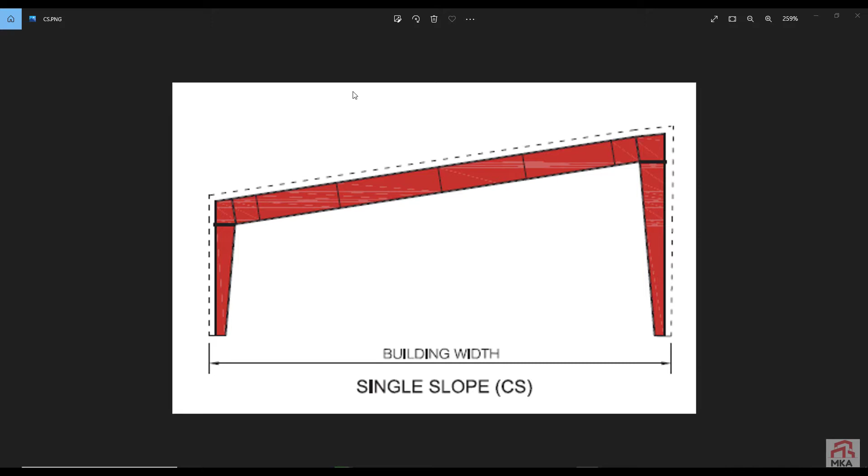In this video, we'll solve the single slope PEB structure project. Firstly, let's open our MkaPEB software. If the software interface is in Turkish, you can select the language from the language setting option.

Let's start by creating a new project and open the new project. Let our truss length be 20 meters, column height is 8 meters and axis spacing is 6 meters.

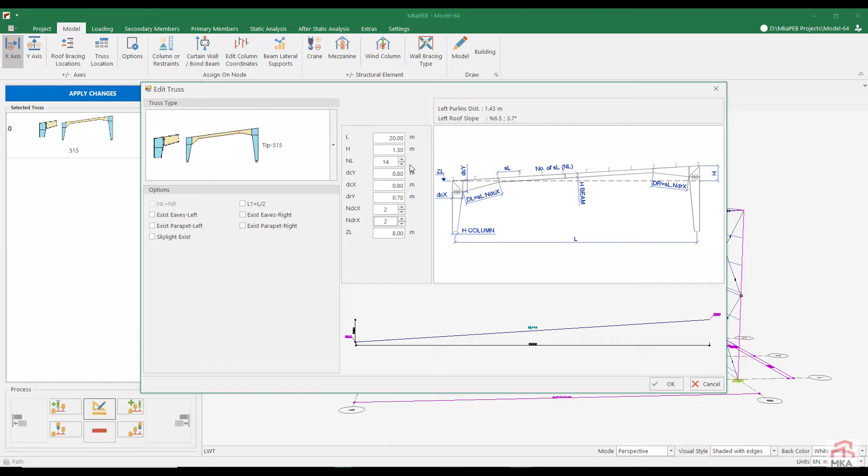Firstly, let's fix our truss attributes from the Edit Truss window. The tapered region will continue along the two purlins at the corners. The column edge height at the corner is 0.80 meters, or 1 meter if possible. It is a roof that doesn't have much slope, it has a slope of 6 to 7%. Let's update our structural model by pressing Apply Changes.

There are many loading codes in MkaPEB. I assume this project will be done in India, therefore I choose IS 875 as the loading code. There are sandwich panels as cladding on the roof. It is possible to define from this section whether there is a solar panel on our roof or not. But we will not use solar panels in this project.

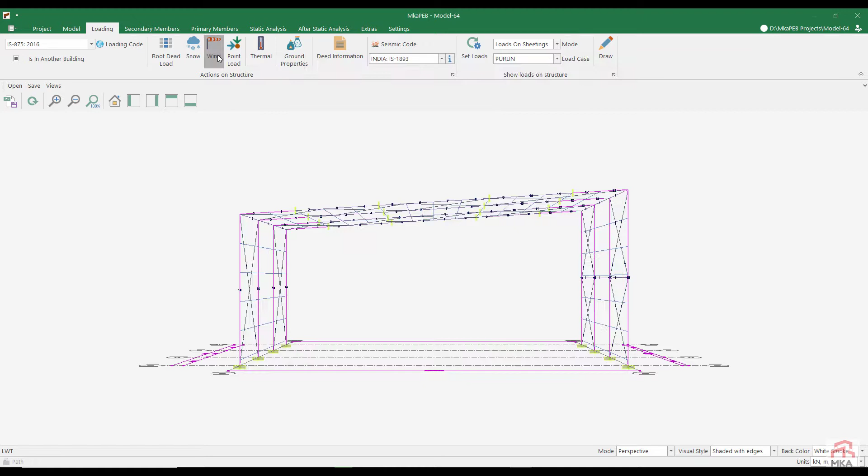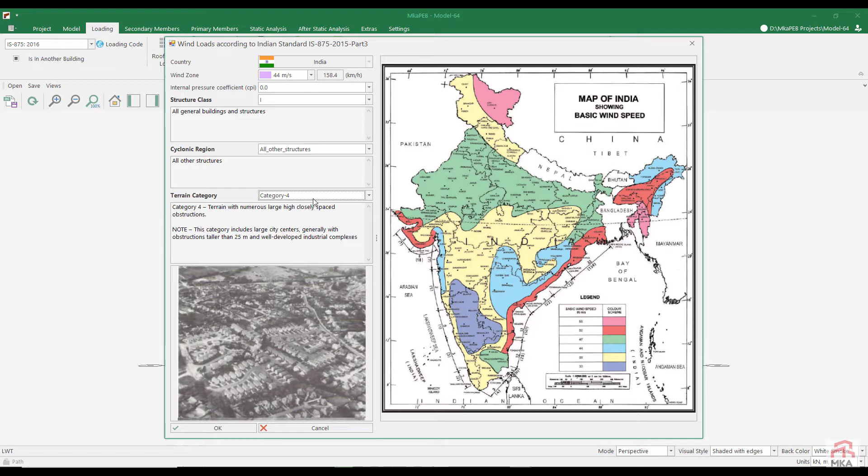Let's define a snow load of around 10 to 15 kilograms per square meter, considering the rain load. Let's select wind speed as 44 meters per second, and not consider internal pressure coefficients. Our building is inside the city, so choose terrain category 4. I close it by pressing the OK button.

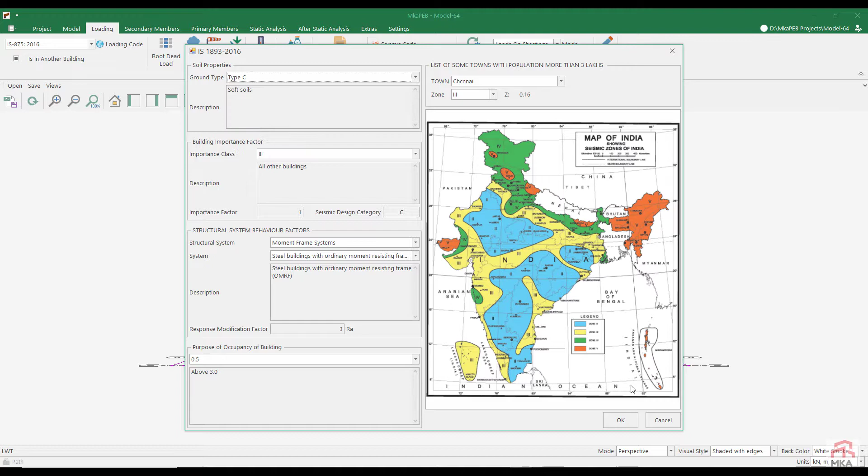Let's move on to the secondary elements. The program includes many structural steel design codes: Turkish, American, Indian, Saudi Arabian, Eurocode 3. I assume our building is in India, so we have to use IS 800.

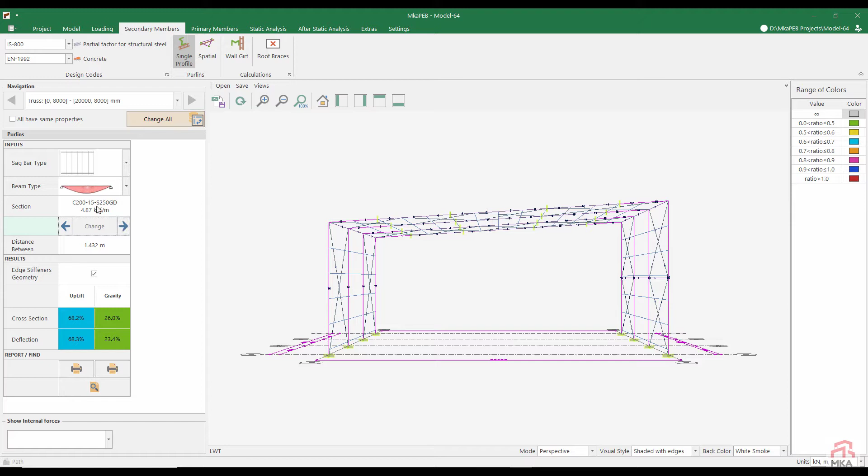I try to choose the roof purlins as light as possible. The loads acting on the roof are so small. I can define the C200-15 profile as the purlin section, 4.87 kilograms per meter. We can use sag rods, there is no change due to the low roof slope.

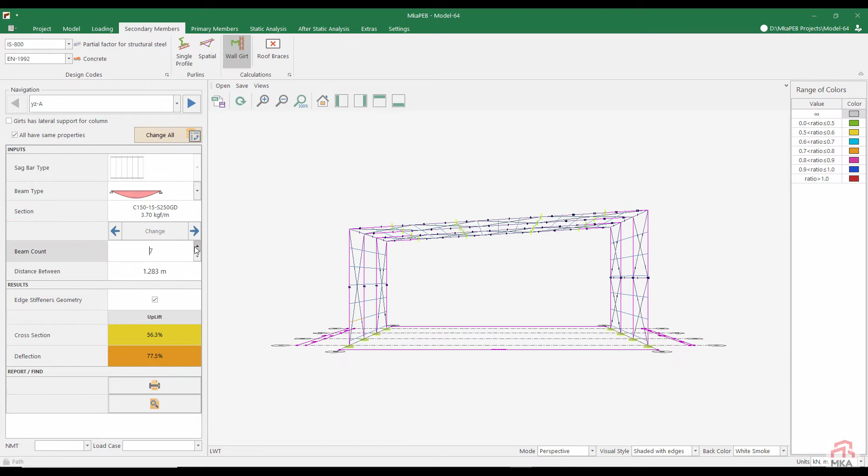Let's move on to wall girts. I want to use the same wall girts on the right and left of the building. So I marked all to have the same properties. The C200-15 section seems to be sufficient here too. Let's see if there is a smaller section. If I increase the girt count to 7, it will be the C150-15 profile, 3.70 kilograms. On the other axis of the building, there is no problem either, it works at 90% of capacity.

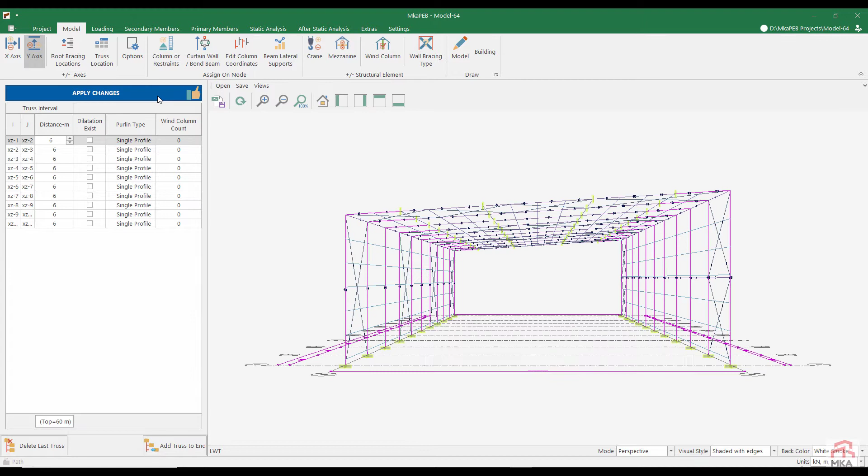Let's make our building a little bigger then. Our building width is 60 meters. Main columns, right and left columns. 140 by 10 over there. These profiles are not currently in the database, so I'm adding them myself. 400 by 8. We have chosen the starting section of this column here. The higher cross-section at the upper end of the column will come from the truss properties.

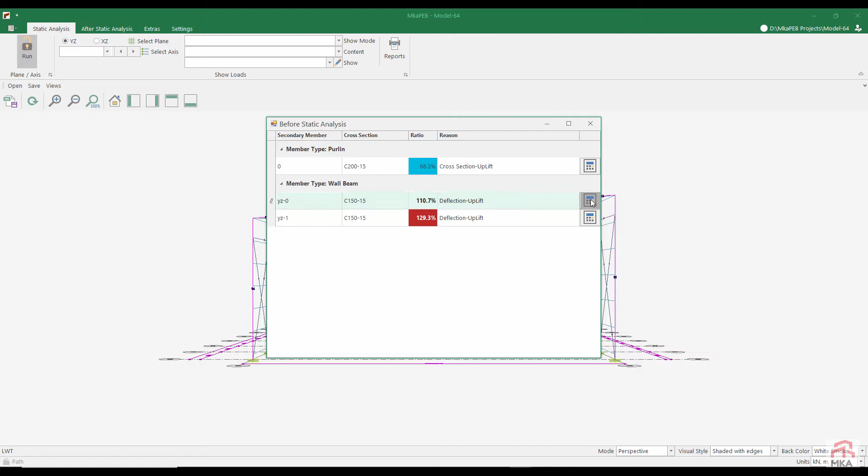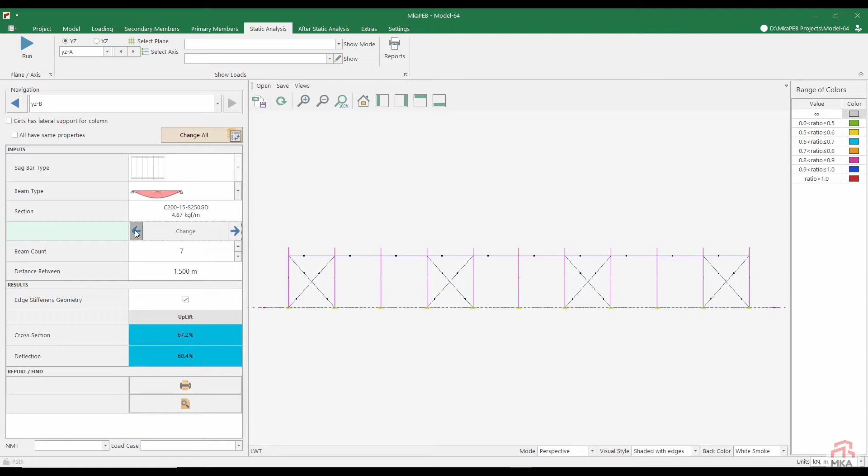Now we come to the beam section. I will use the same profile in the beam section. There is a problem at the girts. The program says that the width of the building has increased and the wind loads on the girts have changed. 150 to 20 or 200 to 15, which is better? This one looks lighter. I looked at the other side. I've replaced it with the same cross section, 200 to 15.

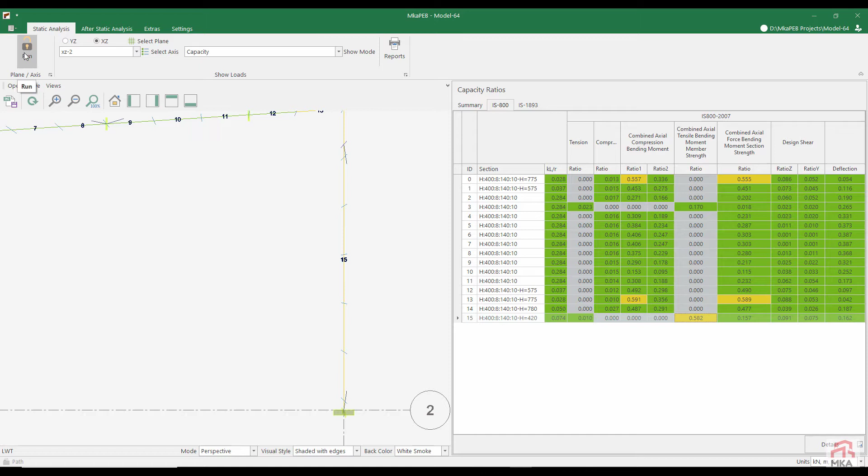We have a capacity of 58% in the columns we have chosen. I think these are the column sections 14 and 15. In the beams, I have chosen a little too large sections. We can shrink them a little. Maybe 300 versions, not 400. Main columns, I'd use not 400 to 10, but 300 this time. Even thinner. In S235 steel quality.

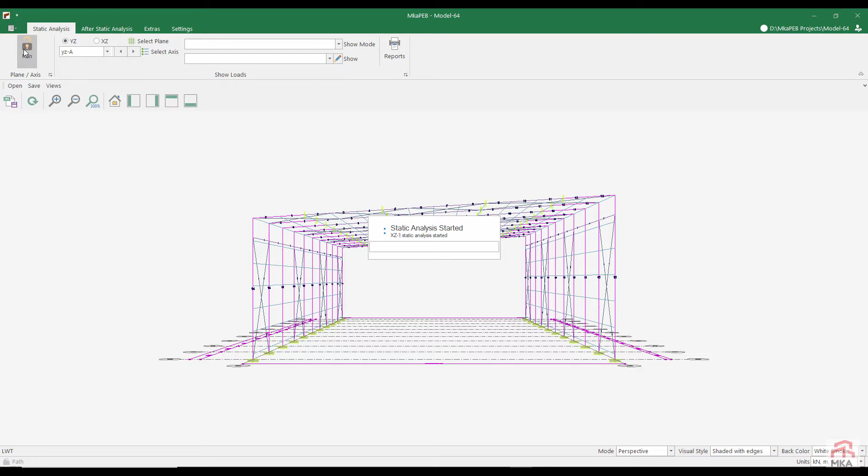Beams can also be chosen differently, but I'm thinking of starting with the same material and finishing with the same material right now. While our brace rods on the side are at 70% capacity in this state, our columns are at 83% capacity. Let's take a look at the cost. I wonder if we chose something expensive. The section we will use in a 20-meter span is 26 kilos per square meter.

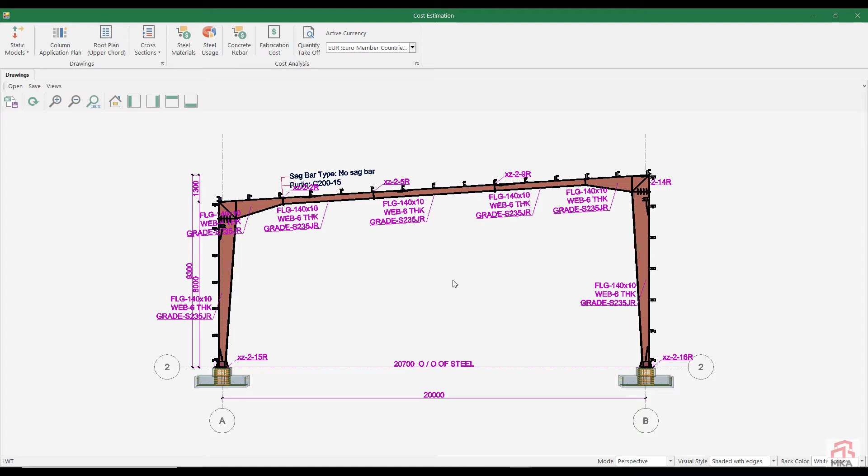Let's look at the shape of the building. Is there any place that bothers the eye? It would have been better if one or two more purlins continued here. Maybe we could make it a little lighter then. 26 kilograms is pretty good for this type of structure, but let's try to get even lower, shall we? For this, I first increase the following from the model section.

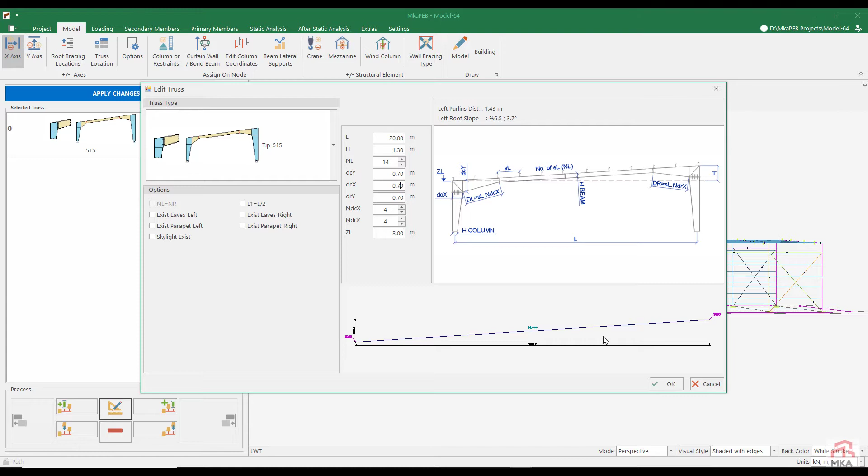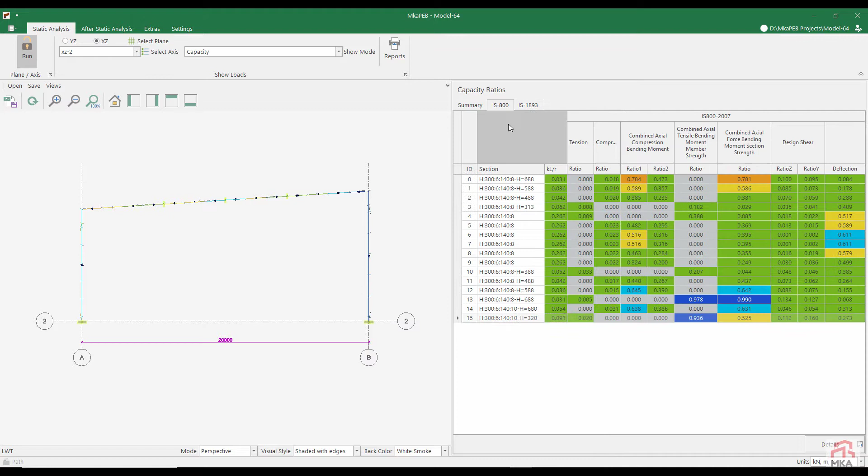Columns and beams. Let's see from here. There is no problem in earthquake regulations. When we look at it, all frame elements' cross sections are enough. Now the approximate cost analysis: 24 kilograms, by simply changing the sections.

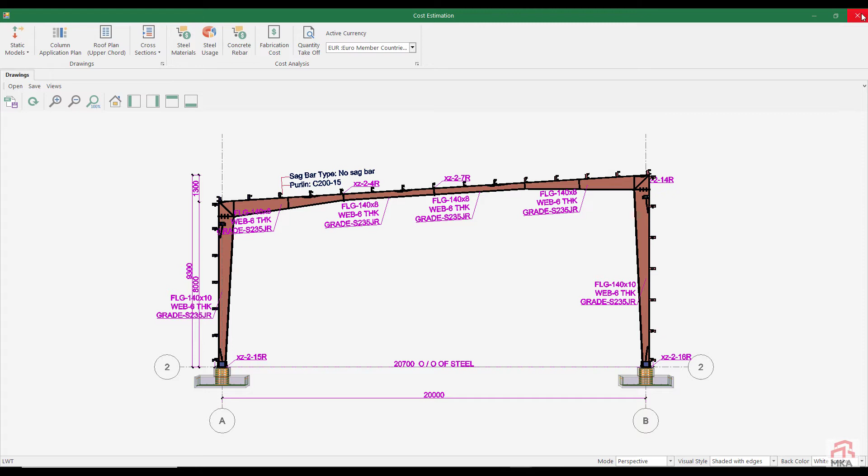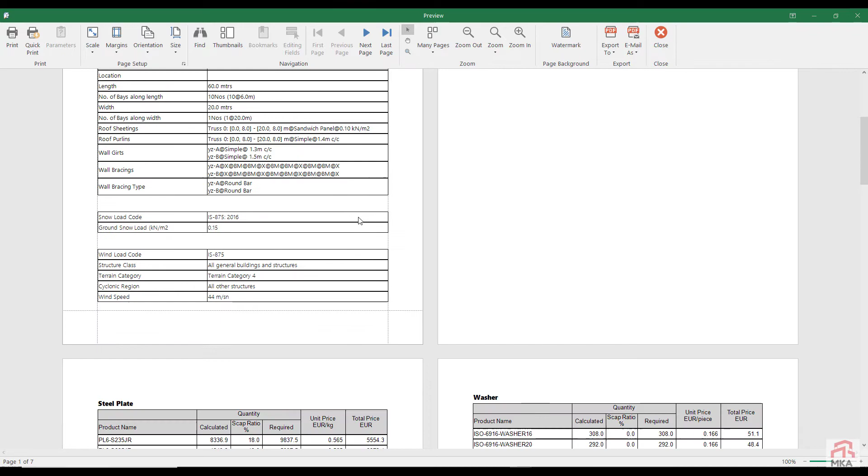Let's look at the cross section of the structure again. It turned into something like this. Now from here, we can actually access the diagrams of its frame elements. The schematic representation of the roof plan. The information of the columns and braces used. You can access the list of materials here. These are the things that show how much they've been used. There are nuts, bolts, anchors and stuff here.

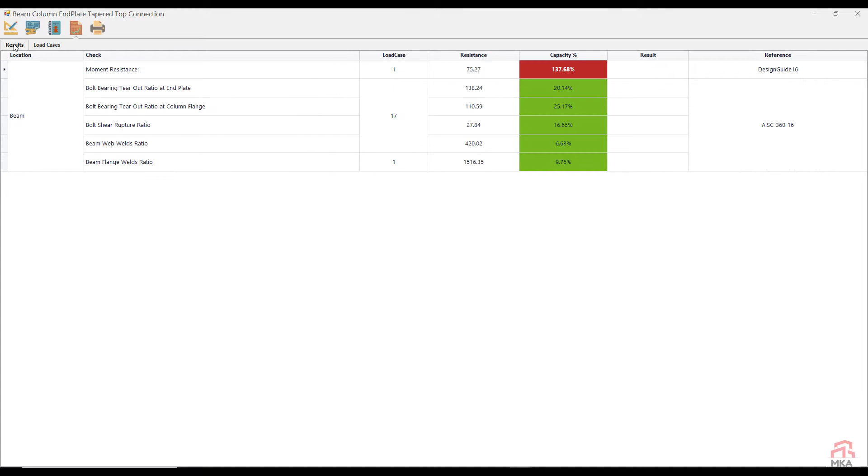Now one of the missing analyses in this building is connection calculations. Let's see what's the problem with that connection calculation. Connection analysis will be made for the following load combinations. The program says there is a problem with the moment resistance. What is the source of the problem? It's usually the thickness of that plate. Here, a 15 mm thick plate will be used. Let's see if there is anything bothering the eyes. I don't think so. We save this as XZ20R.

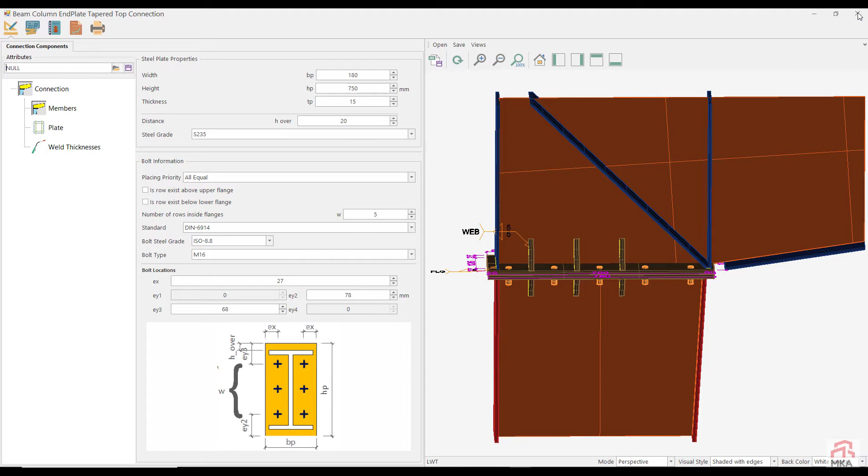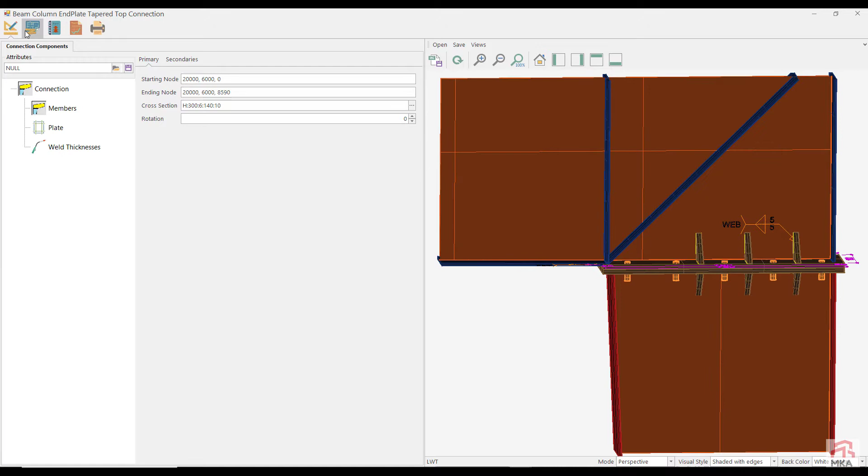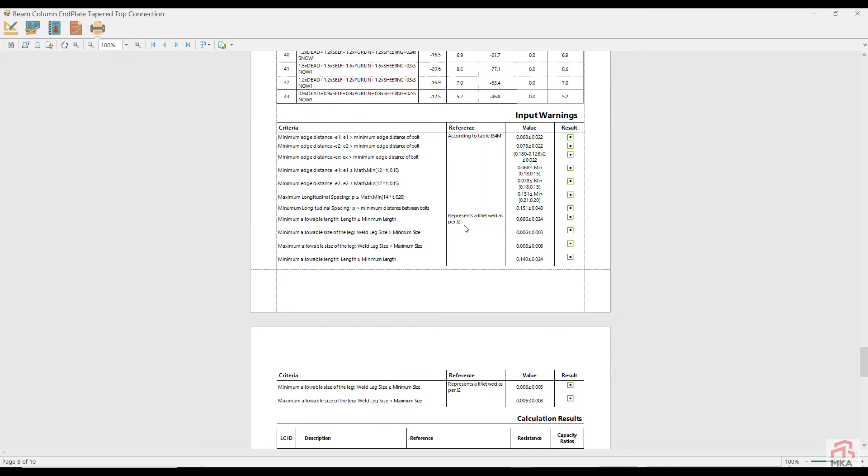Now I've moved to the right side column of the building. Connection on the right. It will be something similar to the left column connection. Let's look at the results. The connection attributes are correct, everything is sufficient. We looked at the connection itself, nothing bothering us. We can get two-dimensional connection detail drawings from here. These are dimensional controls on the thickness of the welds and plates. From here, we can go into the details of the calculation and see the detailed calculations about the connection detail here. How the calculation is done is explained in detail here.

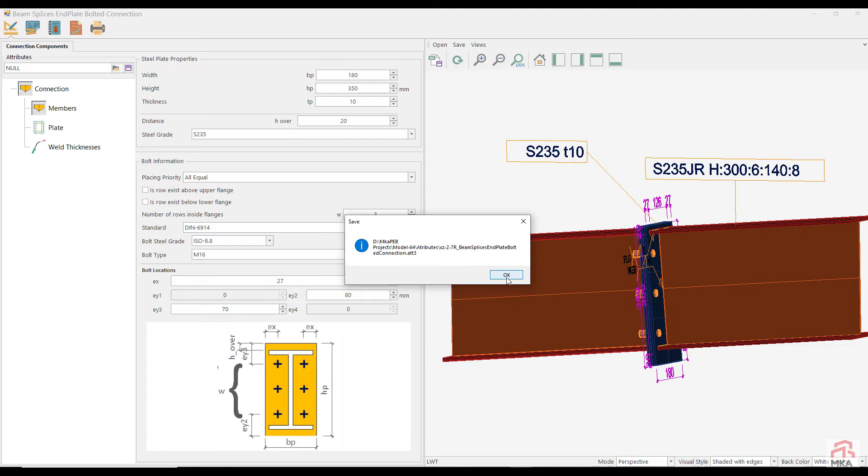Between here, 2 beam splices left. Looking at the results, there is a problem with the plate thickness. I made this 15 just like the other one. It worked just fine that way. We can put one more bolt in the middle of the plate from here. Let's see. 58%. I wonder if it was enough when it was 10 millimeters? It could be done this way with 3 bolts. We saved this as 7R. There was a problem with node 10. Let's see. There are 3 bolt rows. Let's apply the values we recorded as 7R for this as well. Our plate was 10. That's enough too.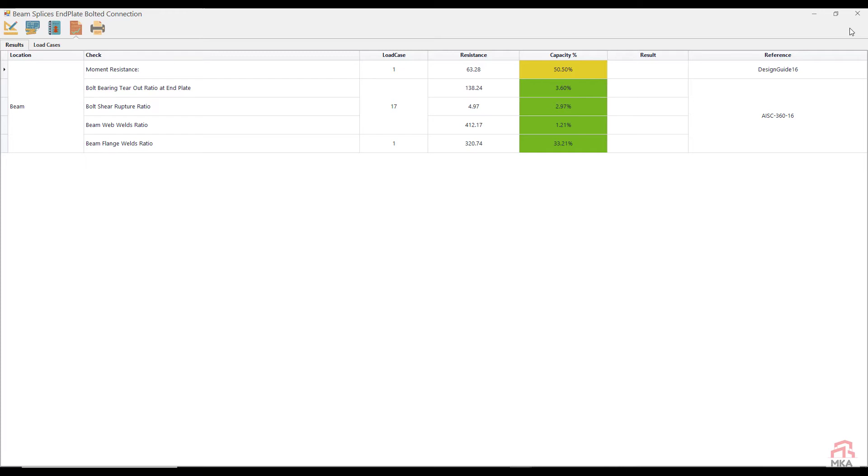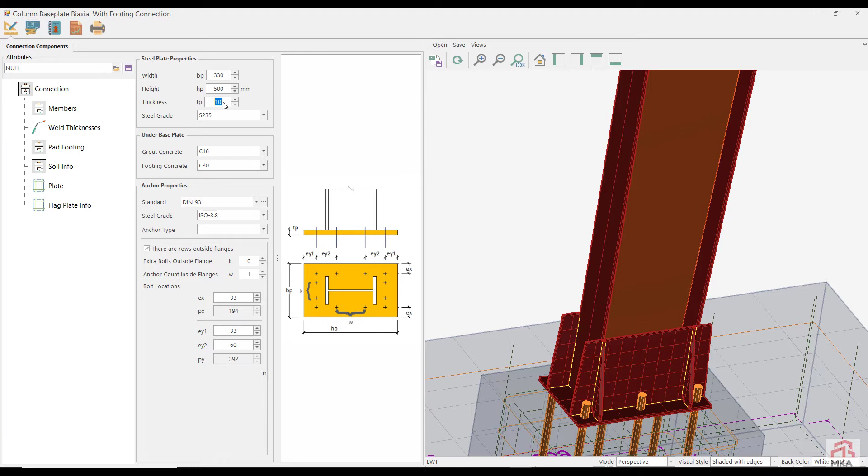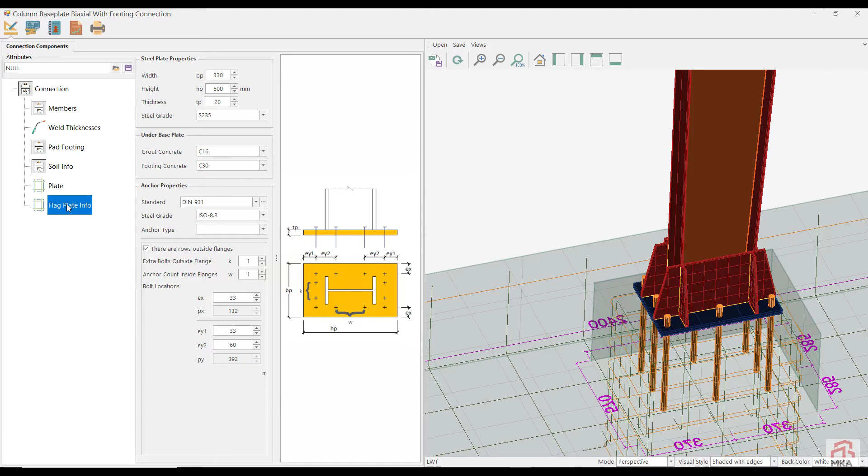Now we come to pad foundation and base plate connection design. Let's see what the situation is with our base plate connection. There is a problem with the thickness of the plate and there is a problem with the reinforcements. We have to increase the plate thickness. First, let's enlarge the plate dimensions. Let's look at the base plate. I made it 330 by 500 and I made the plate thickness 20 mm. Seems to be enough at 90% capacity. I can put one more anchor rod in there. I put an anchor rod in that beam flange. Flag plates are a little too high. That's why I made the heights of these plates 150. It does not take these into account in the calculation, but I think it looks good for the rigid column base. We could remove them if we wanted, but I prefer their presence. Let's see how we are.

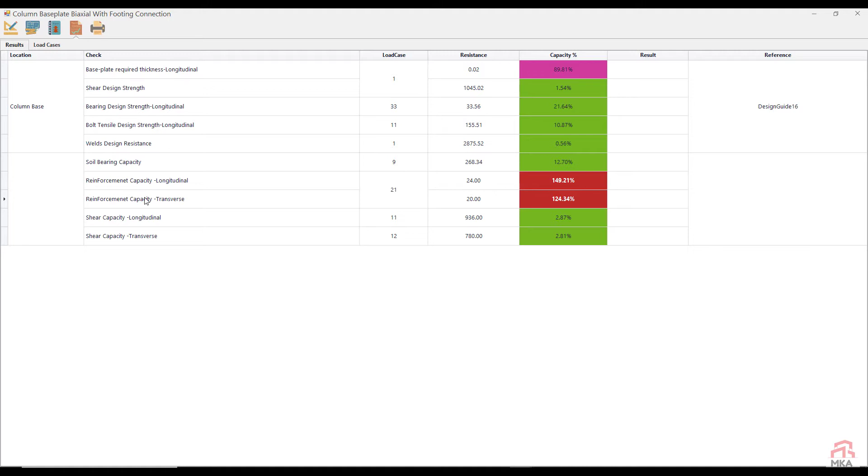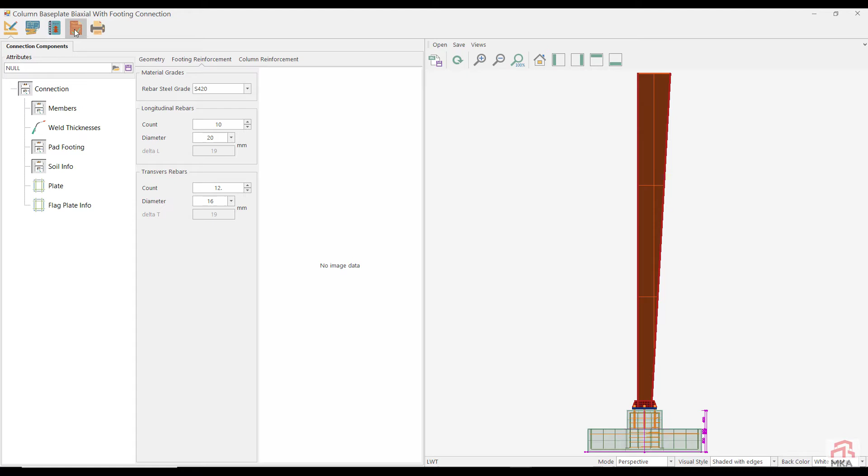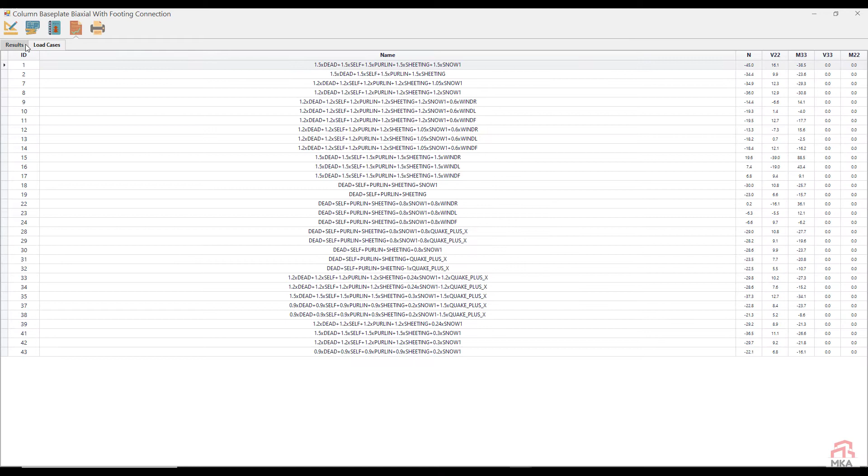All that's left is the reinforcements of the pad foundation. For the reinforcement of the pad foundations, we moved on to the foundation. Reinforcements are here. 10, 10, 10. We need to increase the longitudinal reinforcements a little bit. I made bar diameter 20 mm. It would be nice if I increased the transverse reinforcements a little bit. Let's draw it now. We're going to have one foundation like this. And the column will look like this. I saved this as 15R. We came to the next column base. I looked at the results, same as the other foundation. Let's refresh the drawing.

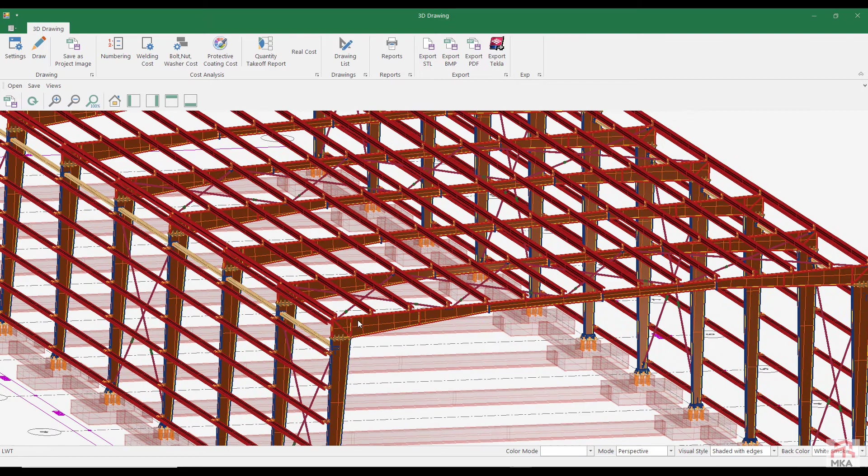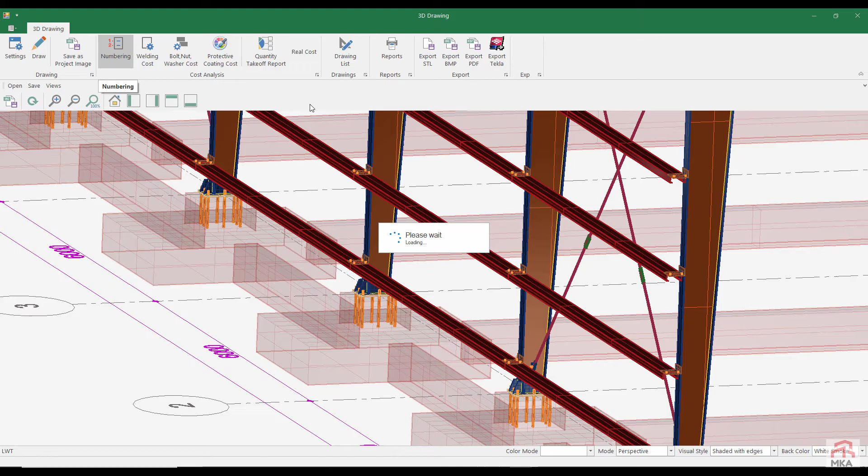Now let's see our structure in 3D. Now let's look at the 3D model of the building. Our program drew the connections, made the stability connections. It tied the rods. It drew the support of the purlins. It drew girts, column base plate and pad foundations. While drawing, the color difference indicates that they are different in thickness. What we're going to do next is numbering. In this state, it weighs 24 kilograms per square meter. Let's take a look at the actual cost here. The actual cost was 25.41 kilograms. There was a weight difference, not 24, it was 25.

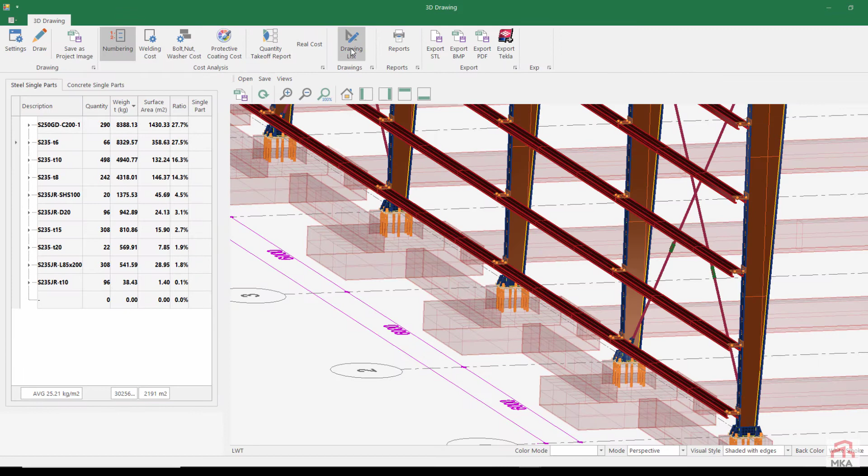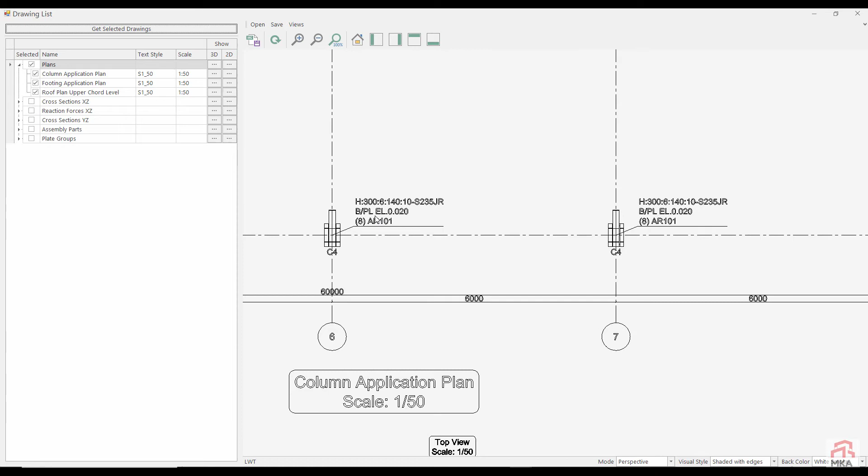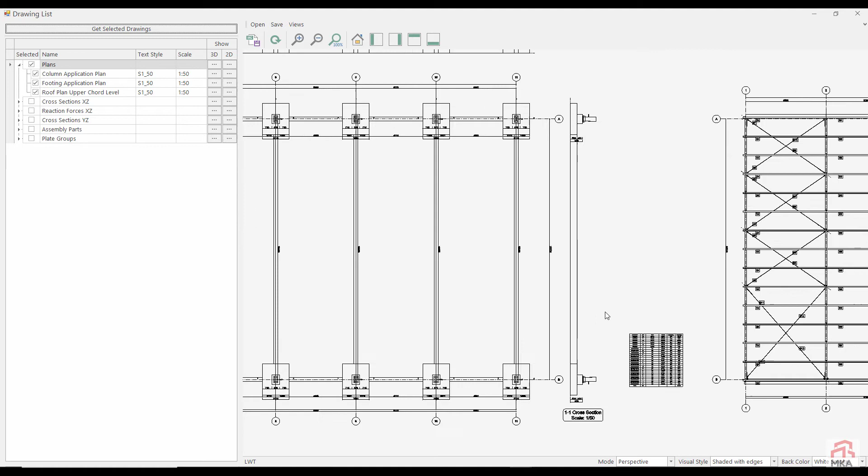Now from here we go to the drawing list. Let's get the blueprints from the drawing list. I want to get this drawing together. The drawings have arrived. This is the column application plan. Here are the anchor numbers. On the side, this is the anchor rod detail. There are base plate thicknesses and dimensions of the nuts and anchor rods to be used on it. There's the pad foundation application plan on the right side. It's got a front cross section over there. There is a left cross section at the top.

This is the roof plan. The parts used in the roof plan have their names here. Here is information about their lengths. These are our plan drawings. Then cross-section drawings. That 2-2 axis is one of the calculated axes. Let's see in order.

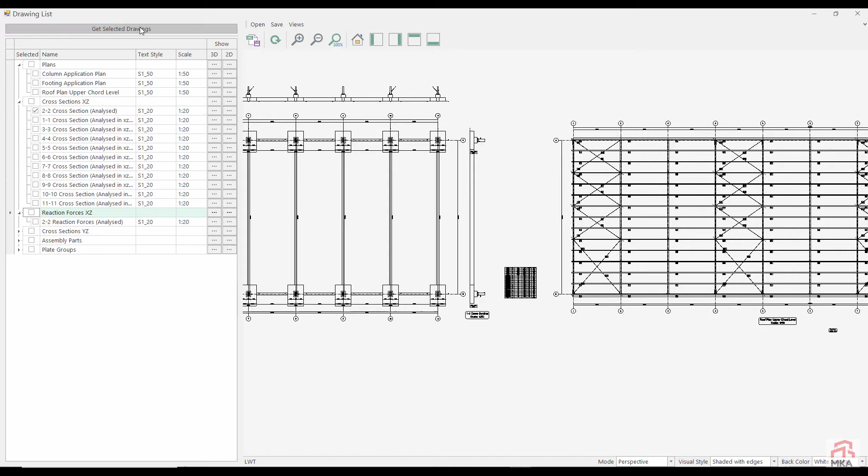It draws cross-sections like this, then draws the distance between purlins. For example, reaction forces are required here.

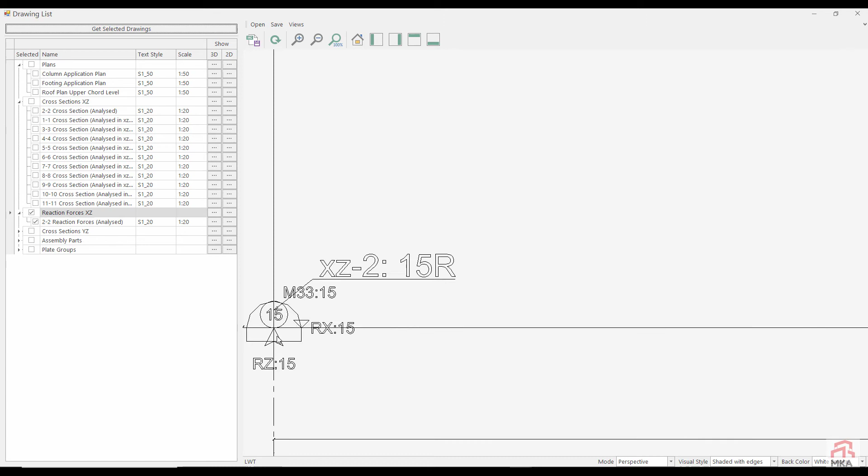This is the model of our construction. These are the symbols of the reaction forces: axial force, shear force, moment of the 15th point. Here are the reactions according to the load combinations.

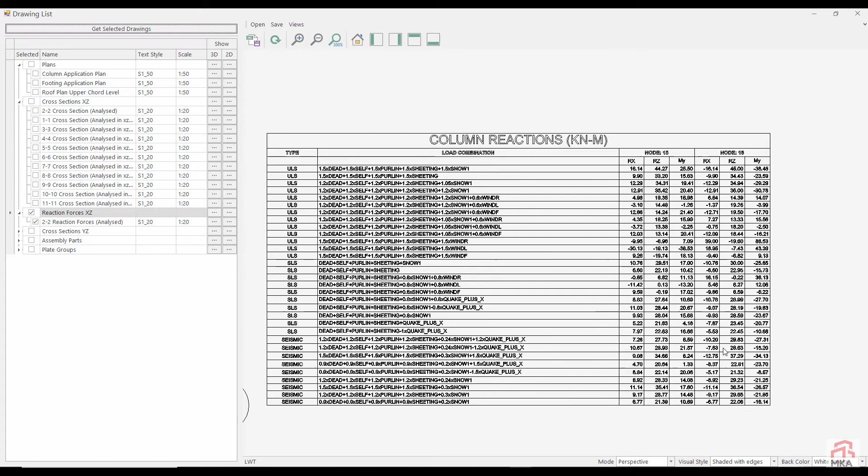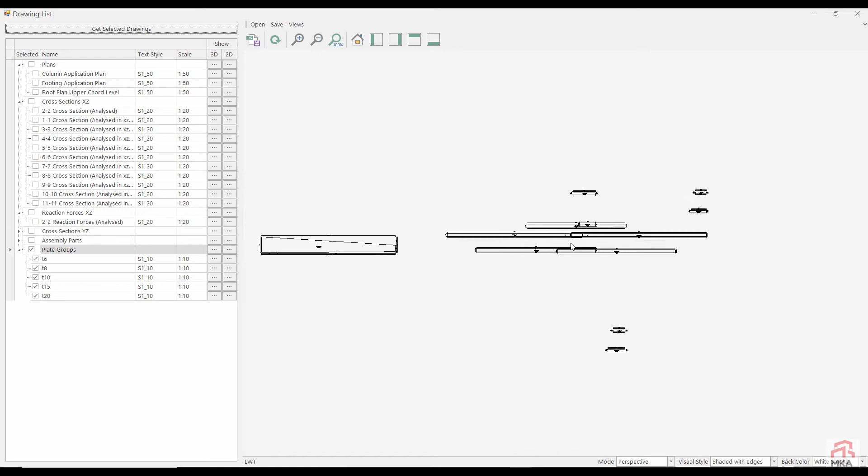11 of these will be cut. Other plates are also listed here, and some of them overlapped. These are our stiffener plates and column base that we use in connections, and other plates.

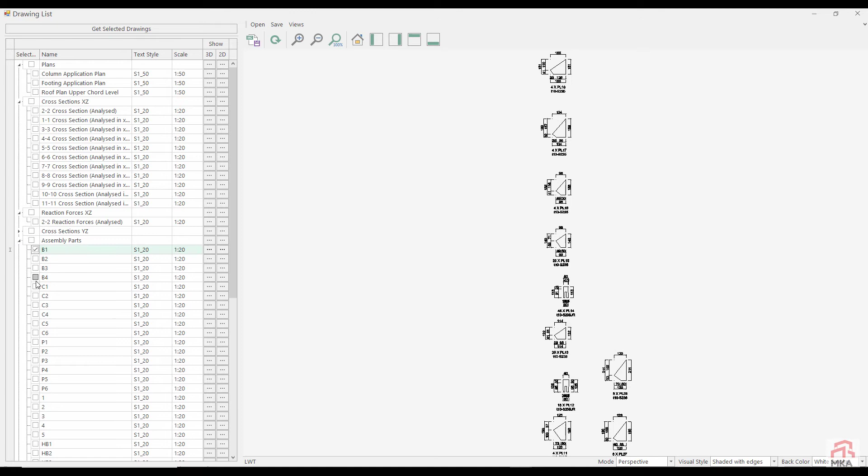As for how to fit them up, let's just see one beam and one column assembly part drawing. This is the assembly part we're talking about, and this is the cross-section that will come at the column beam connection.

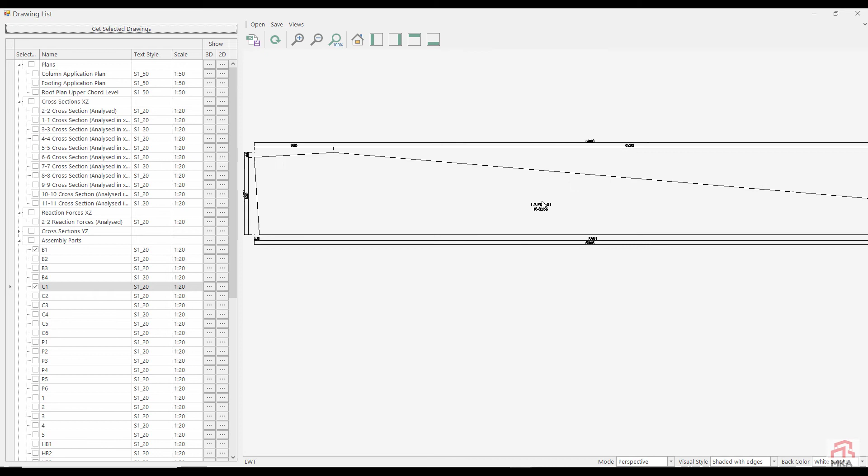That's the other side connection cross-section, and this is the 3D drawing of this assembled part. It will be this way. One of these will be cut for this assembly part, and this piece was already on the plate cut list.

Then the lower and upper flange of this rafter, other stiffener plates - these are the plates that come from the bolted connections. This assembly part can be obtained when the plates are cut and welded in this way.

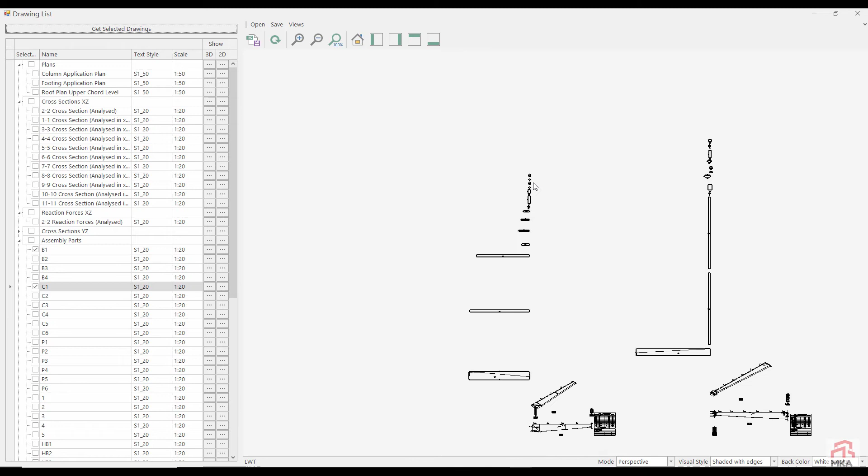This is our C1 column assembly part. C1 columns are described here as PEB C1, C1, C2, C3 single parts needed for it. Those single parts will be cut, and those were cut using CNC plasma.

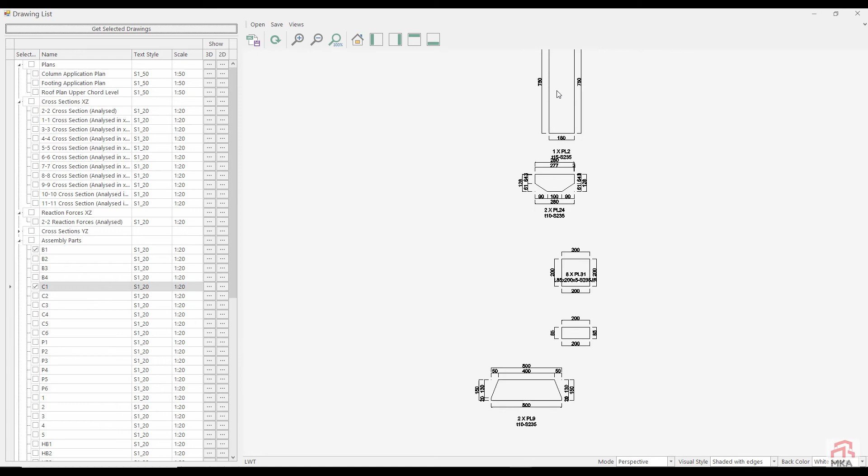We made it on the other side just so that we can see what the dimensions are here. In this way, it prepares the assembly part drawing.

Now let's come to the calculation reports. Let's get some of the calculation reports and see what we have. Let's take this from 2 axes, let's even take all of them. It combines the necessary drawings and obtains reports from them.

We will not keep the next examples that long. Since we have already shown the connection calculations here, there is no need to show the same steps in the others. In the following examples, we will only show the solution of the building.

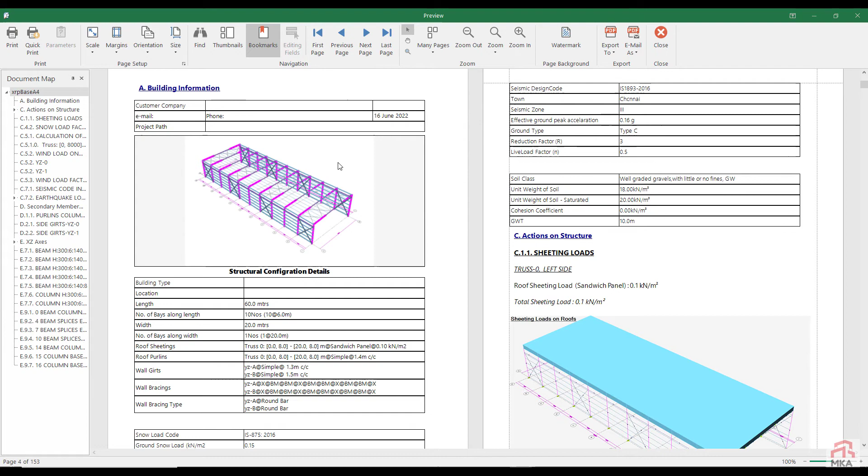Here is the calculation report. It starts with the table of contents, then introduces the building. It shows the cladding loads and snow loads on it. We got a very low snow load in this building.

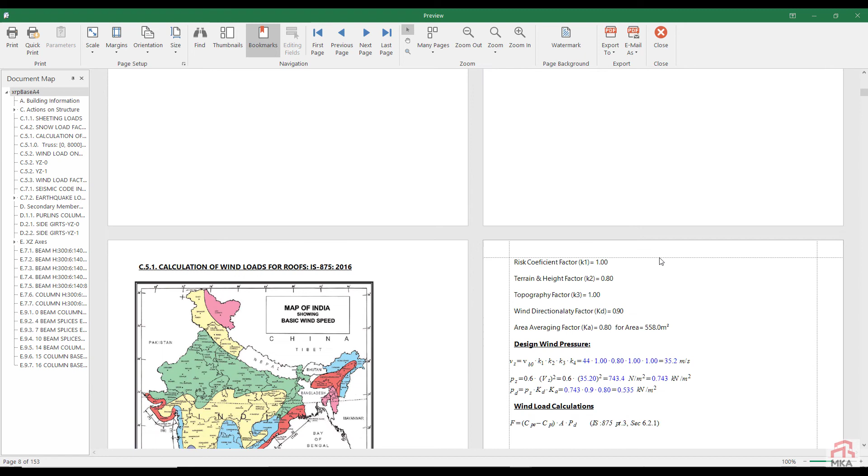These are calculations of wind loads. It applies different loads like this, making 4 different wind loadings such as left, front, right and back. According to these assigned load values, it made calculations.

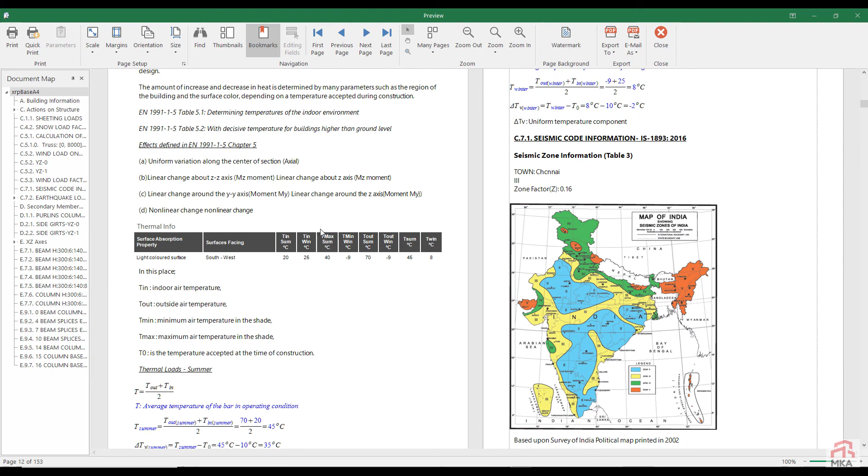Then it calculates the temperature differences according to EN 1991. It will calculate earthquake loads now. For earthquake loads, it calculated the period of this building as 0.806 seconds and distributed them as equivalent earthquake loads.

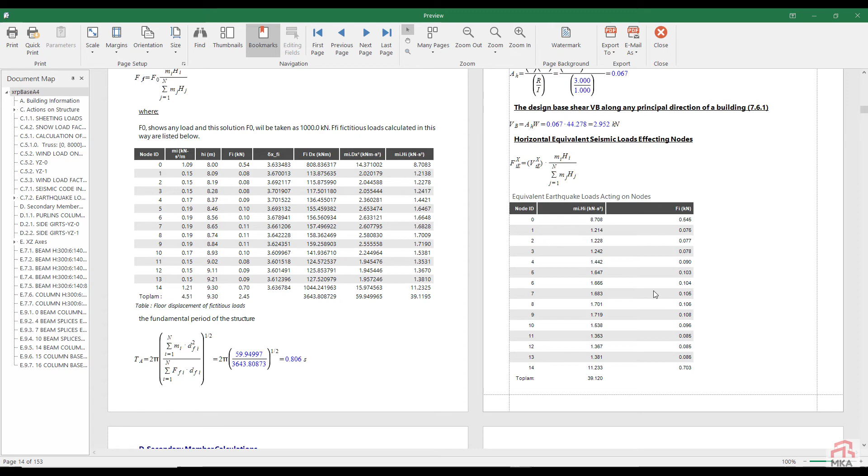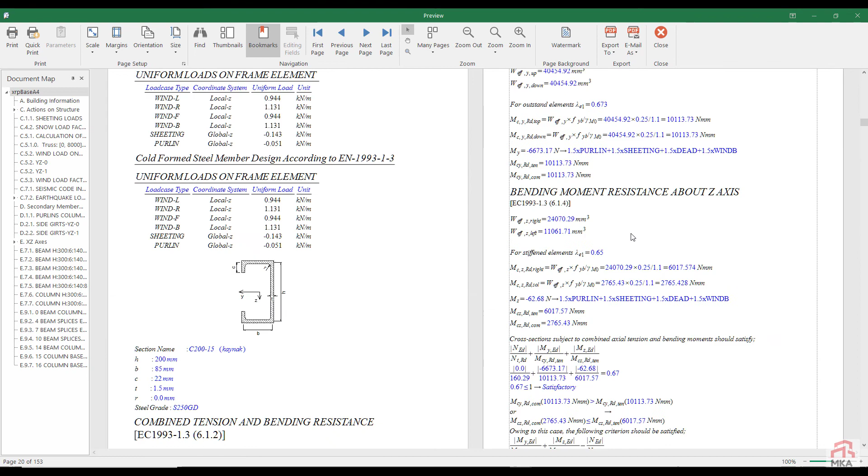Next comes the secondary member calculations. Here is the calculation of cold-formed purlins, and here is the calculation of cold-formed girts.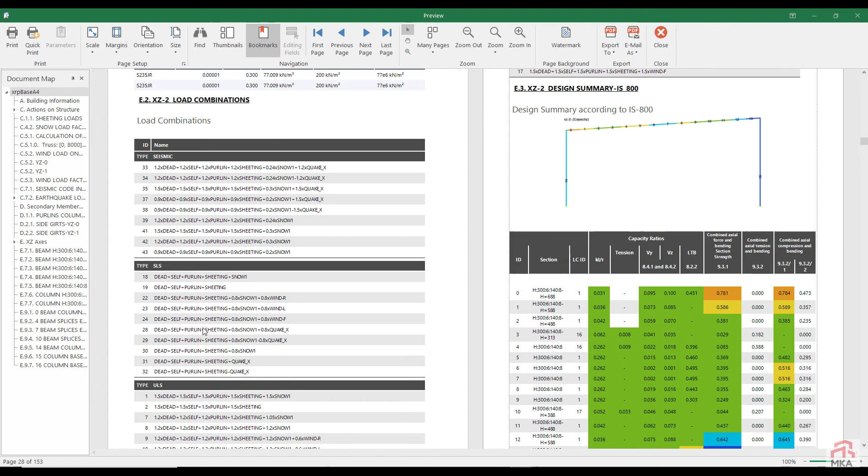When it switched to the main carrier system, it said, 'These are my load combinations.' We calculate according to these load combinations. When calculating, it first gave the design result summary table.

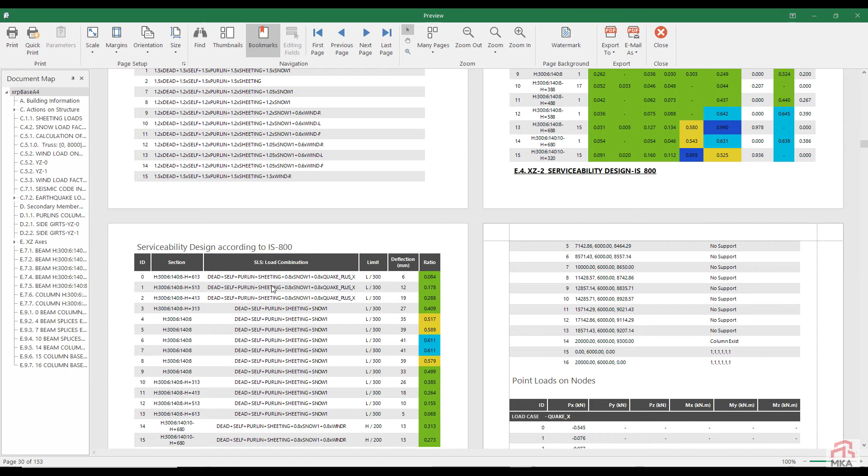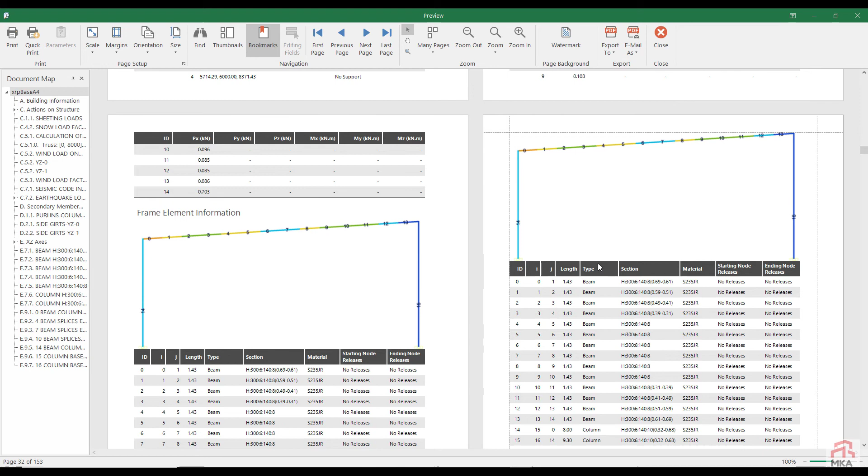Then it checked the displacement in the columns and beams. These are limitations. It gave the information of the frame elements, then gave the cross-sections and steel grades on it, and information about the loads.

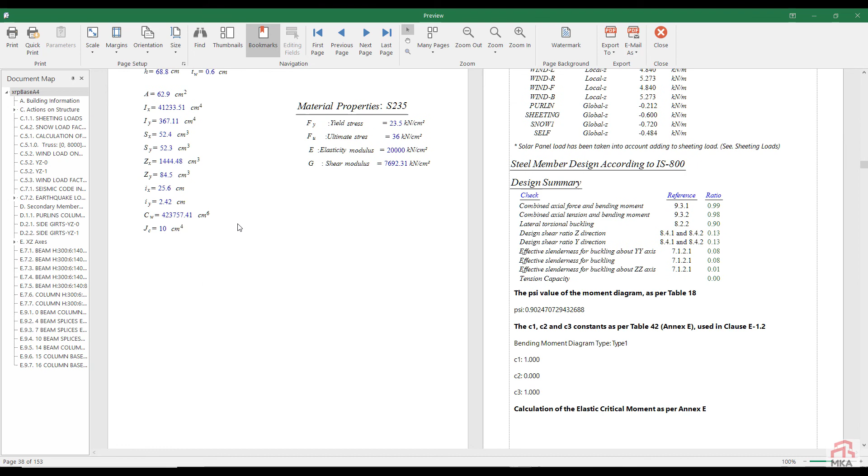Afterwards, it made earthquake regulation checks. Here it checked the relative story drift. Then it came to this H300 beam - it's checking the beams now. While doing these checks, it gave a result summary table.

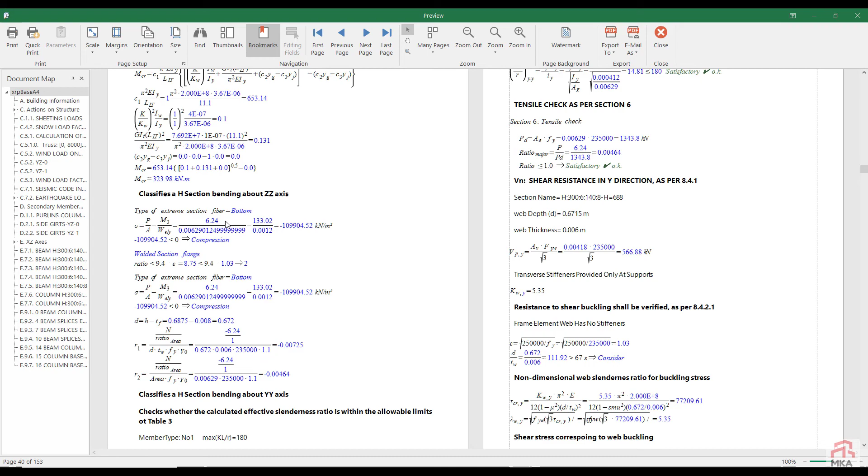Apart from the summary table, this is how it shows the calculations in detail, so that the calculations can be checked. There was a problem with the displacement control over there, even if it's something very small.

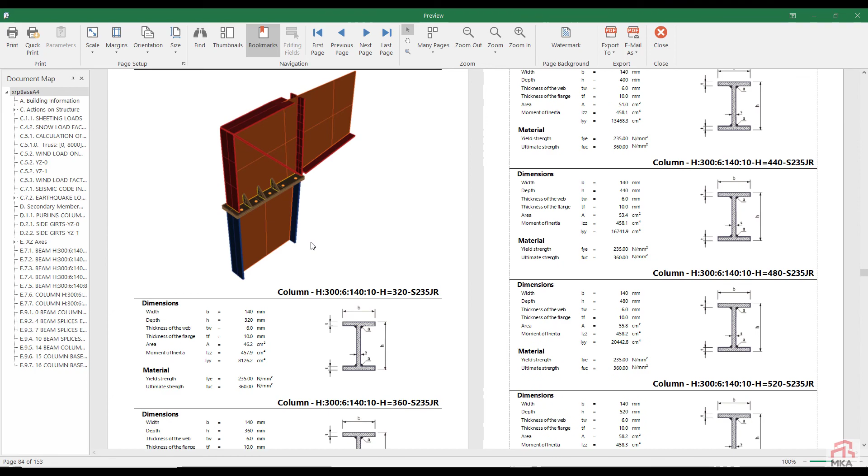Then comes the calculation of connections. Let's first examine this beam column bolted connection. It gives the sections used in the calculation, then load combinations. In this way, it gives detailed calculation reports.

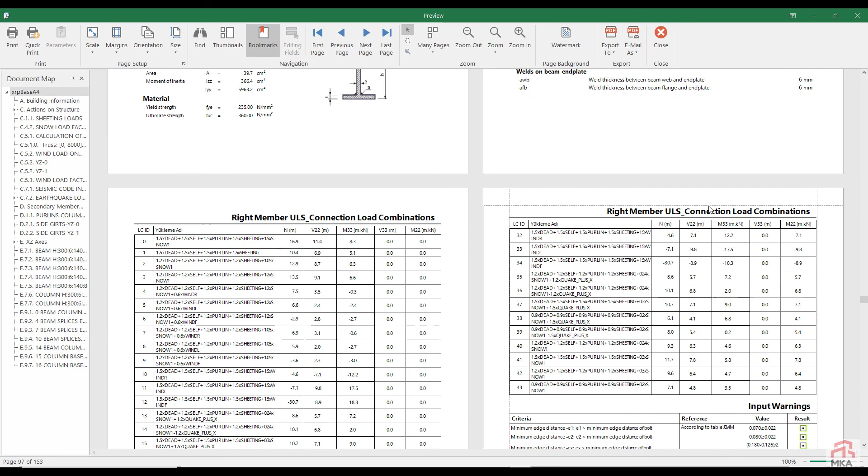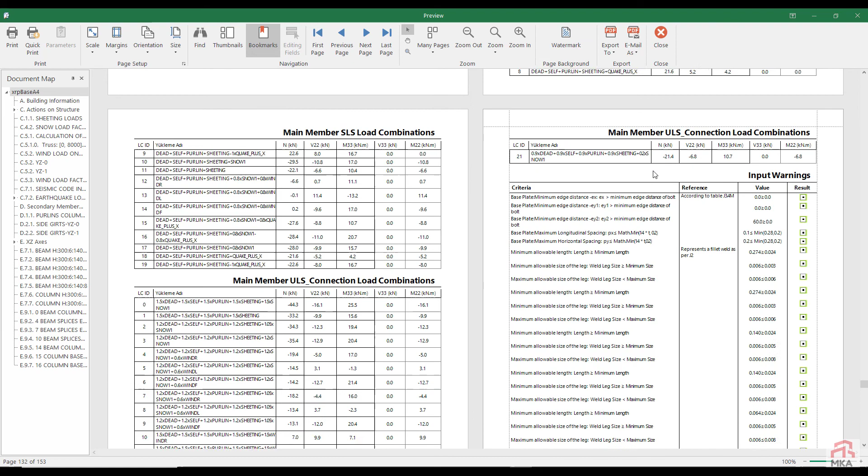Then comes the pad foundation and base plate connection design. When it comes to pad foundation calculations, it calculates the soil bearing capacity according to the Meyerhof formula. Here we enter geotechnical engineering calculations. In this way, we have given detailed calculations by giving calculations of column base and pad foundations.

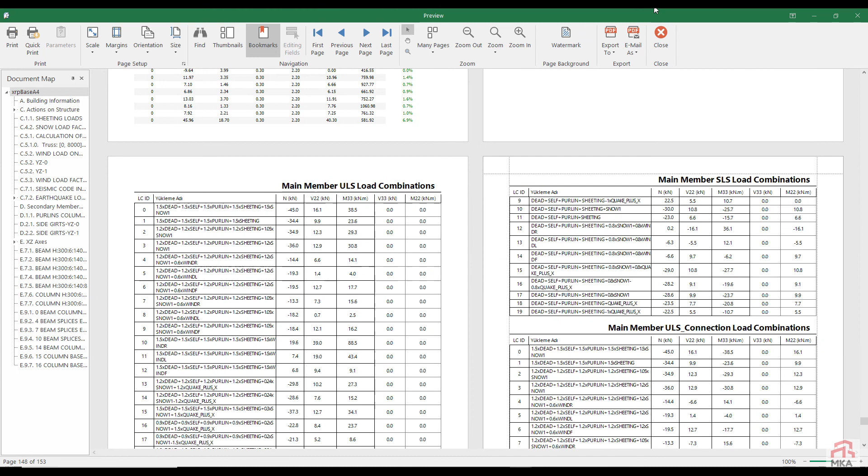There is also drawings so that their calculations are understandable. We thought it would be nice to have a drawing next to it. These are the appendices of the calculation reports, in A3 format.

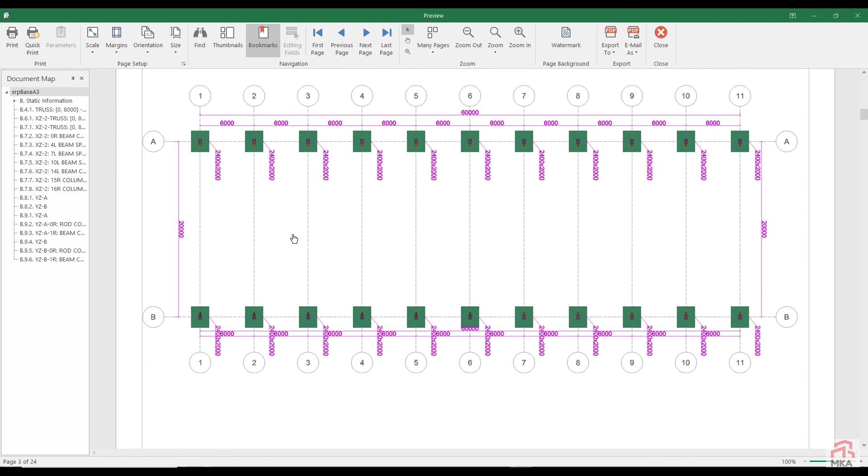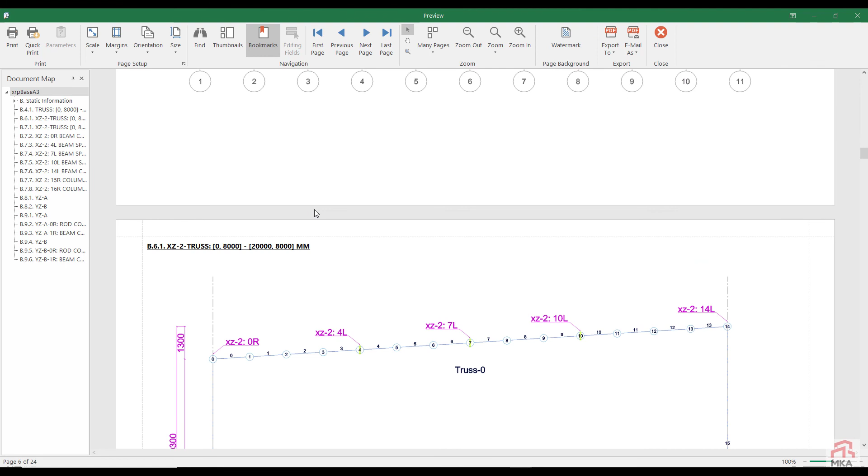Our column and pad foundation application plans are like this. These are the placements of our roof braces. In this way, we finished the project after receiving the reports. Let's see the final version from here. This is the connection detail of column to beam.

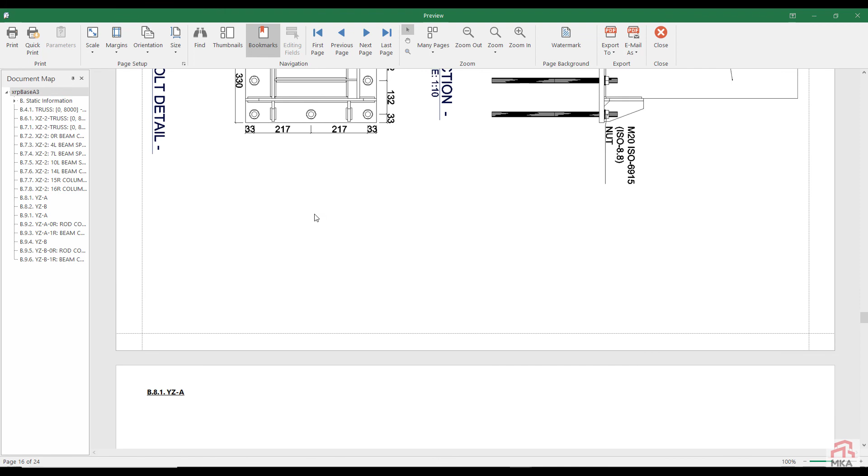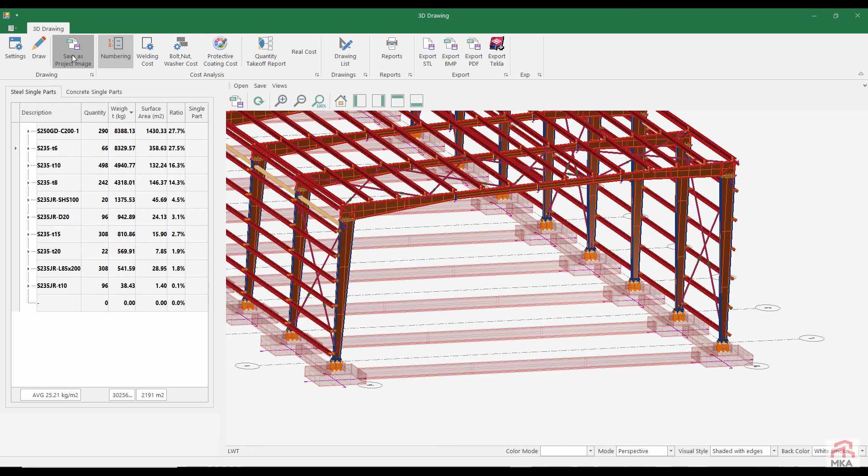Let's see the final version from here. This is the PEB structure that we design. We save it as a project image here. Let's show Tekla export in the next video.